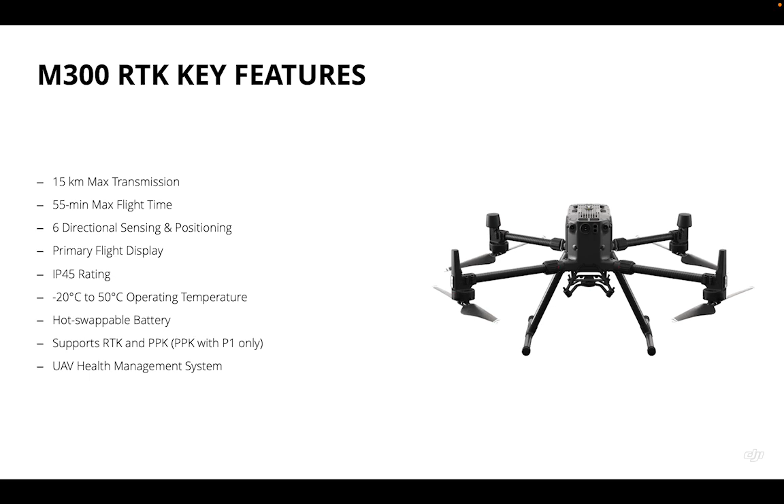It has hot-swappable batteries and supports both RTK and PPK. It also has a UAV health management system, which can track the status of the drone in real time. And equipped with the M300 RTK, we have our flagship payloads. For example, this is the DJI P1.

It's DJI's advanced higher-end photogrammetry payload, which has a 45 megapixel full-frame sensor, and is also equipped with a mechanical global shutter with shutter speed up to 1/2000, and a 3-axis stabilized gimbal, which can easily achieve smart oblique capture, meaning that while the drone is flying, the camera tilts to different angles to capture images, to save time and make it much smarter.

And for example, if we're talking about efficiency, we're able to easily achieve 3 square kilometers of area coverage in a single flight, at 3 centimeter level GSD. Compared with, for example, a Phantom 4 RTK, where per flight we're only able to achieve 1 square kilometer, this is at least 3 times faster than the smaller-size rotary drones.

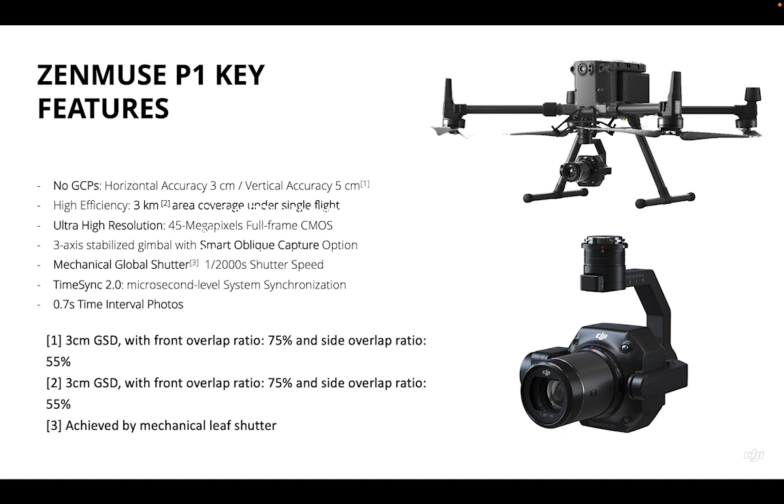For point cloud density, we're talking about 240,000 effective points per second, and it supports 3 returns. The maximum measurement range is 450 meters at 80% reflectivity. And the IP rating is IP54.

It also has a really unique feature called real-time point cloud live view, where customers can look at the screen and see real point cloud data on site, which can help them better understand the workflow and the job site. Again, it's an all-in-one solution, and once you collect the data, you can process it in DJI Terra.

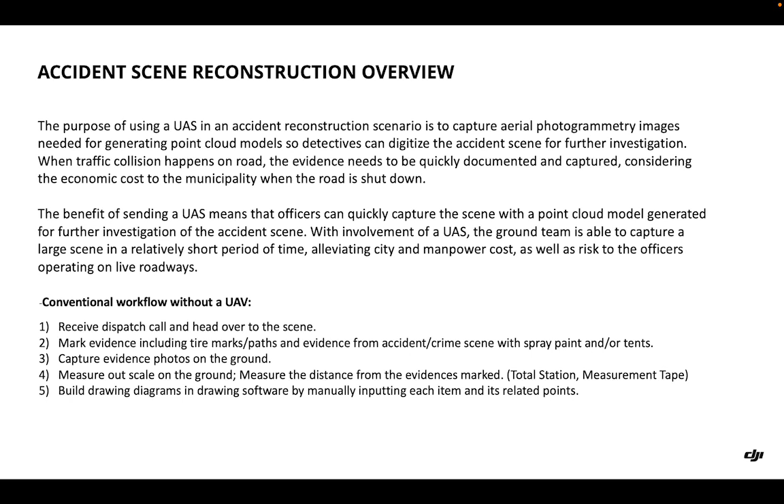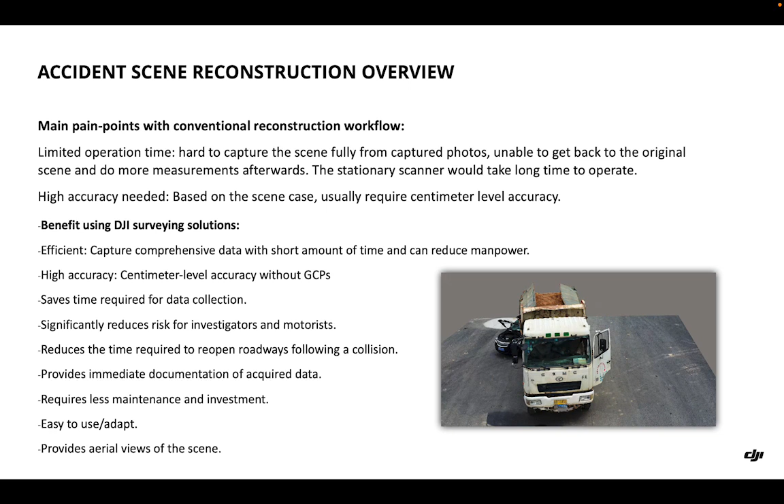So for example, this is one of the cases where data was captured by the Phantom 4 RTK, where 2 cars crashed into each other. We were able to deploy the drone quickly there and fly the area. We imported the data to DJI Terra to process it, and we were able to produce these high quality 3D models. We can see all the numbers, even plate numbers, and where the car got crashed, in a very high res way. So it's really powerful.

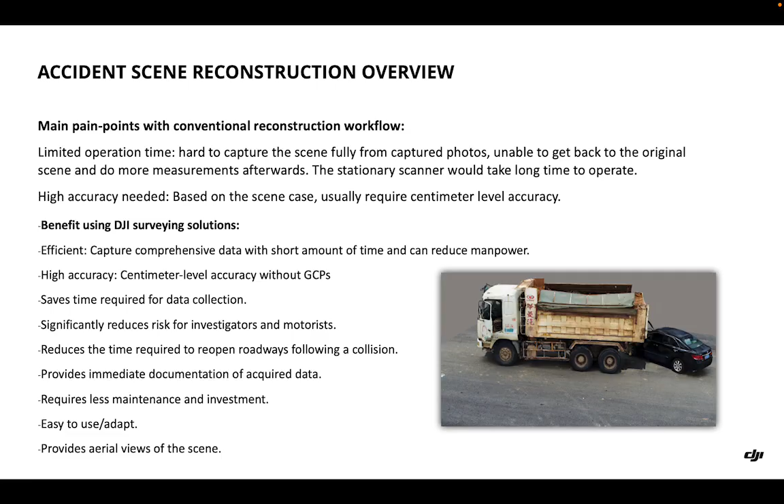And right now we have several different recommended solutions for different application needs. For example, car accident reconstruction: since this is not a really large area, and considering that police officers may want a smaller drone which is more portable and easy to carry, the Mavic 3 Enterprise plus DJI Terra could be one of the key solutions for this. Small enough, smart enough, quickly plan a mission, fly the area, and get data processed in DJI Terra, all in one.

But again, sometimes that accident may not necessarily be a car accident, but it could be a large scale disaster accident or whatever it is. If it covers large areas, and if we want to do not only mapping and modeling but also inspection works, the P1 has a high res camera on it and a much larger efficiency level. We are able to produce the drone footage in a large area and fly much longer. So this could be a solution as well.

For example, this is another solution from 2017, when a train crashed and went off the rails. We were able to deploy the drones there, quickly capture the data and process it all in one there, to help the officers decide how to do all the rescue jobs and also save the digitized data for later applications as well.

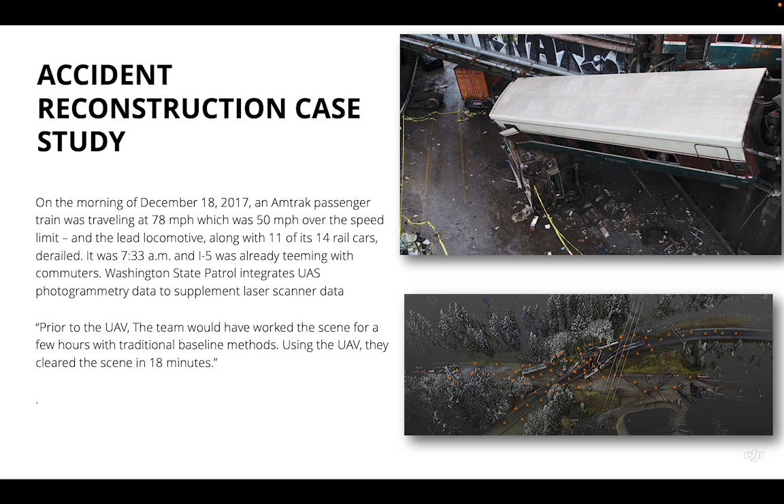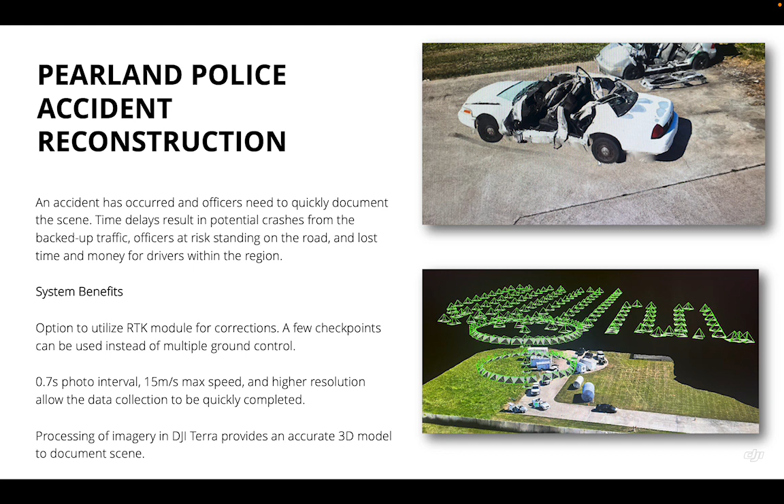This is another case from Pearland police. We flew the Mavic 2 Enterprise, and we captured data with different mission planning methods, like POIs and aerial 2D mapping missions, and with both we were able to quickly process and reconstruct the car accidents, save the digitized data for future applications, and help officers decide what's the next step.

So let's move to more high accuracy related geospatial solutions. And of course, one of the common applications could be cadastral survey solutions. When we're talking about cadastral survey solutions, the purpose of using a UAS during cadastral survey is to capture high resolution aerial photogrammetry images needed for generating an accurate surveying level map.

Sometimes cadastral survey could be really complicated. With the traditional method, the surveyor needs to bring their handheld RTK, walk around, and position and measure as many points as possible, which is really time consuming, and also some areas may not be easy to access. But those are not problems when using drones. We can quickly deploy the drones and fly the area to capture the landscape, all the buildings and roads, with all the pixel data. Then we can convert that pixel data to points to measure, digitize and vectorize the data, to produce what we need for cadastral surveying.

And of course, for cadastral survey, there are a few products that will be DJI recommended solutions. For large scale mapping, the M300 RTK plus P1 will be a recommended solution, because it can cover a large area, like I mentioned previously. If you want to know more detail about the DJI P1, we have another training deck. Please go to that training deck to understand more about how the P1 works, saves cost and brings efficiency up for all industry users.

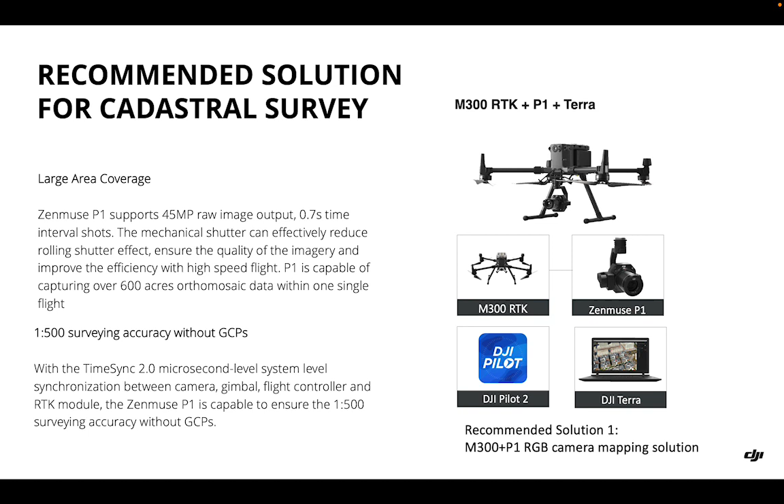And for a smaller area, for example if the total area is less than, let's say, 5 square kilometers, maybe the Mavic 3 Enterprise RTK could be a good solution, because it's portable enough, cheaper, same accuracy, smarter, all in one, and you can easily fly the area, capture the data, and then bring the data and process it in DJI Terra.

So this is one of the cases where we used the P1, from Datong city, China. We're talking about a 10 square kilometer area using the M300 plus the P1. The flight height is 240 meters. We were able to achieve 3 centimeter per pixel GSD. We flew 9 flights in one day and were able to capture 10 square kilometers of data. When we processed the data, roughly around 6,000 images, it only took about 9 hours in DJI Terra.

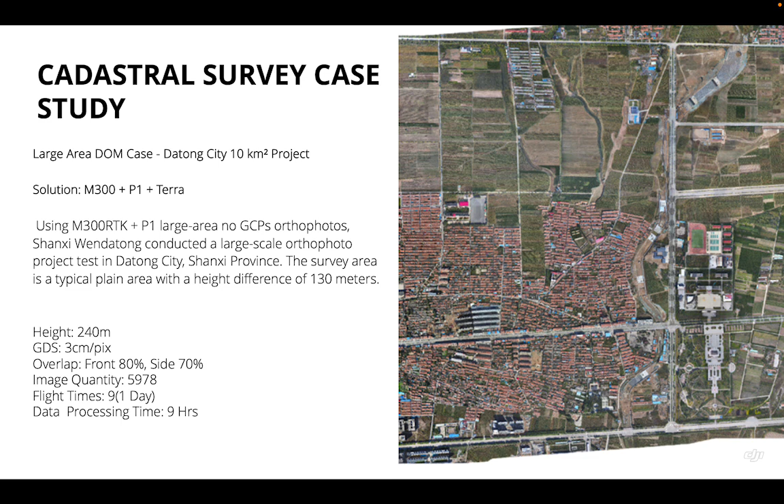And this is where we placed all the GCPs; you can see all the white dots are the GCPs that were evenly distributed. But we didn't use those GCPs to improve the accuracy; all the GCPs were applied as checkpoints so we could measure the RMSE accuracy for both horizontal and vertical, and we were able to achieve less than 4 centimeter accuracy for both horizontal and vertical.

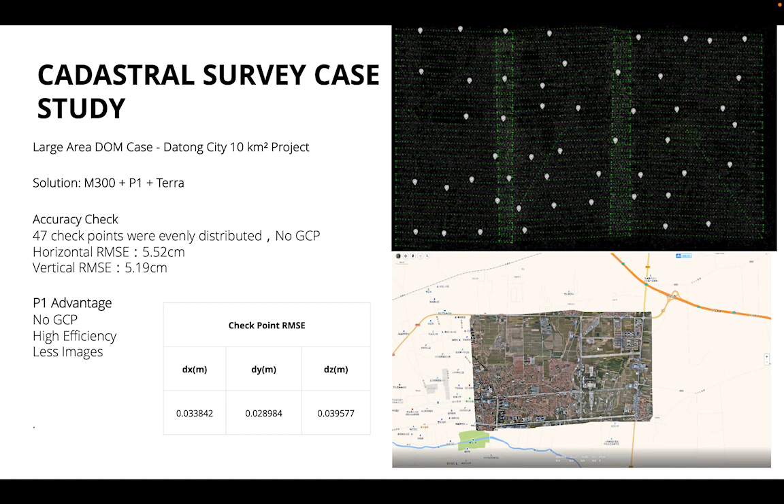And this is another case, again, one of the cases in China, in Anhui. The area is around 65 square kilometers, a 1 to 1,000 topographic project. We're using M300 plus P1 and DJI Terra. We flew the area at 260 meters and at 3.3 centimeter GSD. The area covered was 65 square kilometers in 3 days,

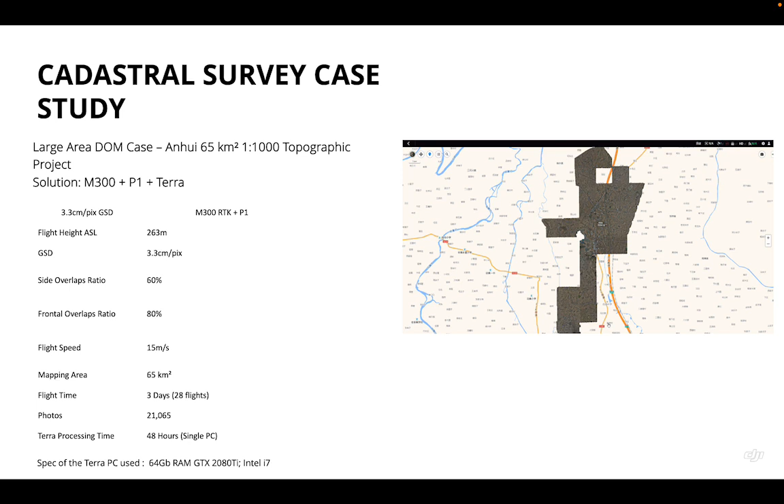28 flights, over 20,000 images, and it only took 48 hours for DJI Terra to process it. Single PC software and a single PC computer. The specs of the computer are 64 gigabytes of RAM, an RTX 2080 Ti and an Intel i7. This is what we are able to deliver for these cases.

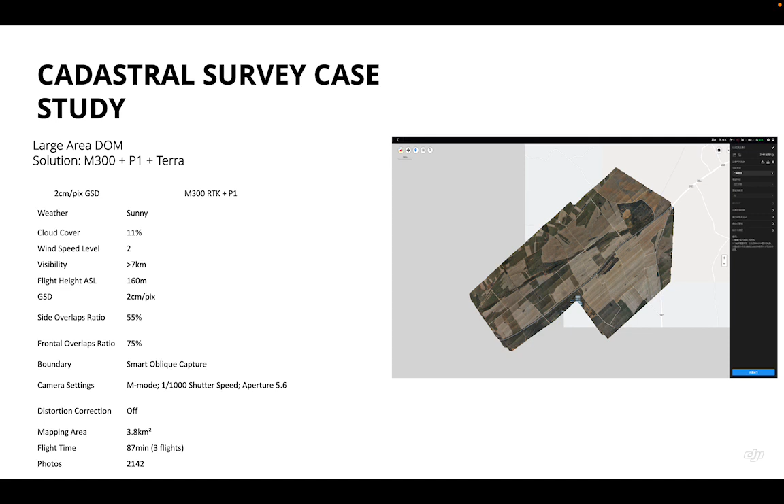Yeah, really incredible. And this is one of the smaller cases, where we're only talking about 3.8 square kilometers, and you can easily see that the flight time is really short, only 87 minutes, with over 2,000 images. Pretty much in a couple hours, you're able to deliver everything you need.

And this is one of the cases that we tested and applied using the Mavic 3 Enterprise plus DJI Terra. This is a relatively large area, and sometimes we may recommend customers use the P1. But this is still a great case where the customer used the Mavic 3 Enterprise to map over 15 square kilometers at least at 5 centimeter GSD.

One Mavic 3 Enterprise, 9 batteries, 150 meters altitude, and 4 centimeter GSD. In a single day, 15 flights, we were able to capture a data set like this, over 9,500 images within a day, and processed it.

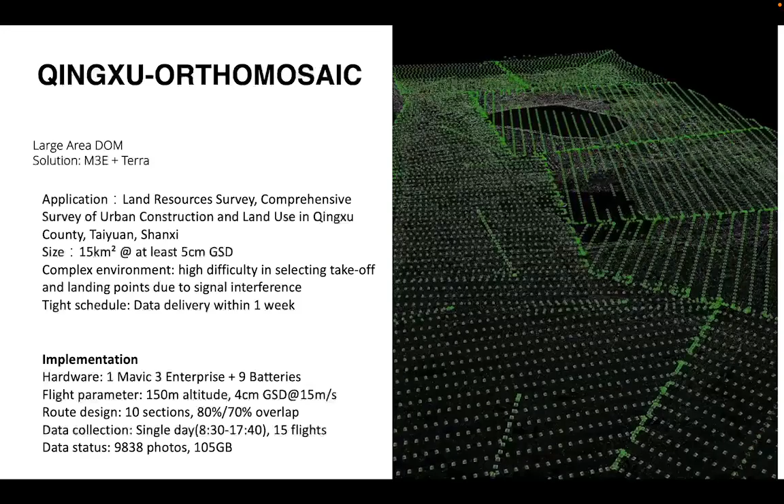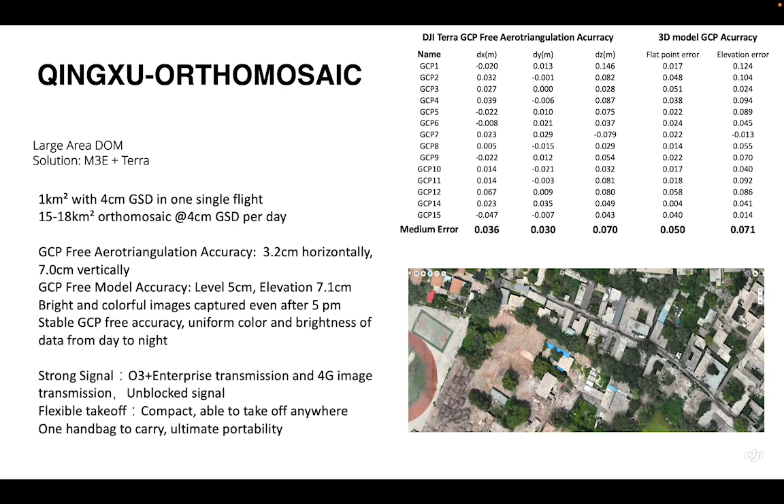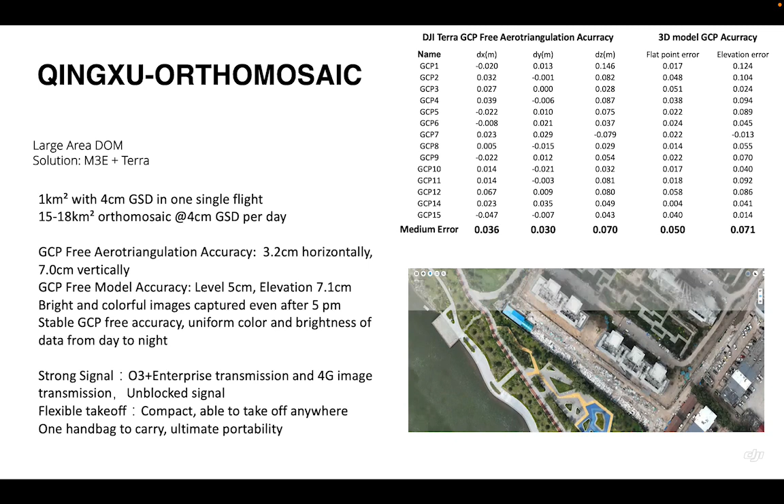And this is another case. Again we're using the Mavic 3 Enterprise. We were able to achieve this case within a day. You can see in the right corner the 2D map that we reconstructed using DJI Terra with data collected by the Mavic 3 Enterprise. The map quality and all the details are crystal clear, and the accuracy is pretty impressive.

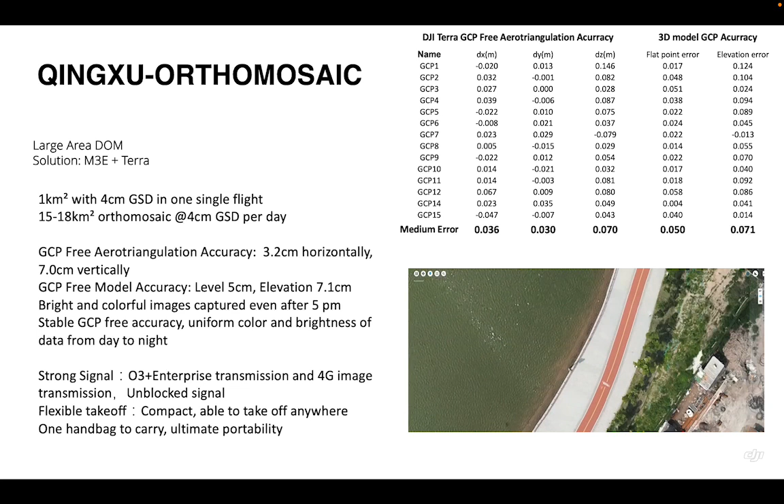So now we move to topographic survey solutions, which are sometimes not all about cadastral work; more cases are needed for landscape measurements and modeling. That's why we have solutions for this. One of the unique products we can use for topographic solutions is the LiDAR sensor, because of its ability to penetrate vegetation, right?

Sometimes when we're doing land surveys, we need to get the data of the ground and remove everything above it, like trees, buildings and towers. With the LiDAR sensor, because of the unique physical features of LiDAR, we're able to have different returns that easily help us differentiate the landscape and classify it into different classes.

So this is DJI's first all-in-one LiDAR solution, like I mentioned previously, which is equipped with a high-res, high quality geospatial camera, the same as the Phantom 4 RTK, plus the DJI LiDAR sensor and a high precision IMU system, in an all-in-one solution. And one of its key features is that it's really easy to use.

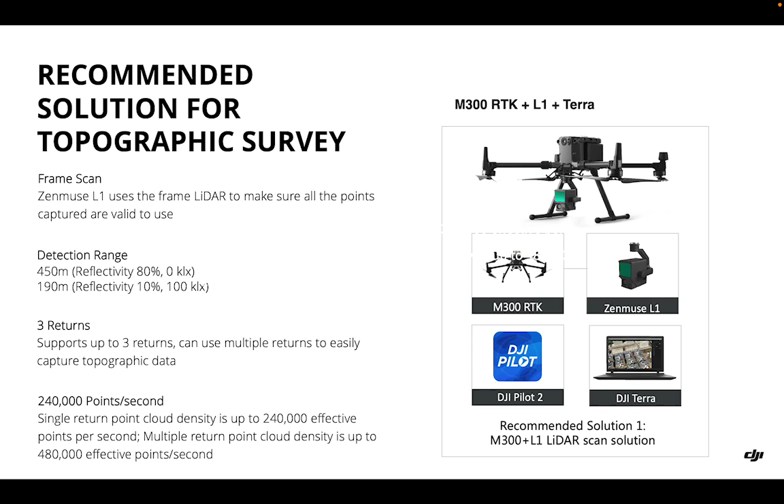With other LiDAR products, customers may need to do all the IMU calibrations manually by themselves, which really raises the level of skill needed to use the products the right way. But for the DJI L1, we build in all the calibrations automatically. Customers can fly the drones and do all IMU calibrations automatically. All the customers really need to think about is capturing the data and processing it. All the mission planning is built into DJI Pilot, which makes the solution much easier to use and operate.

And of course, the Mavic 3 Enterprise could be another solution as well. If we're talking about high accuracy and smaller job sites, the Mavic 3 Enterprise will be a turnkey solution for them.

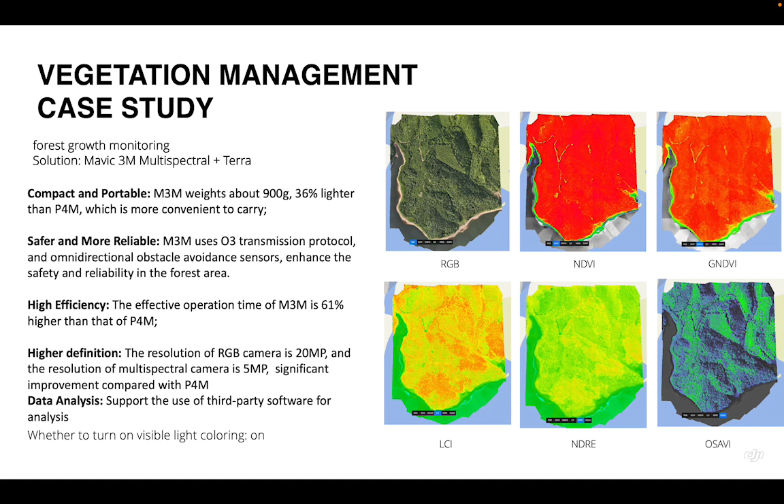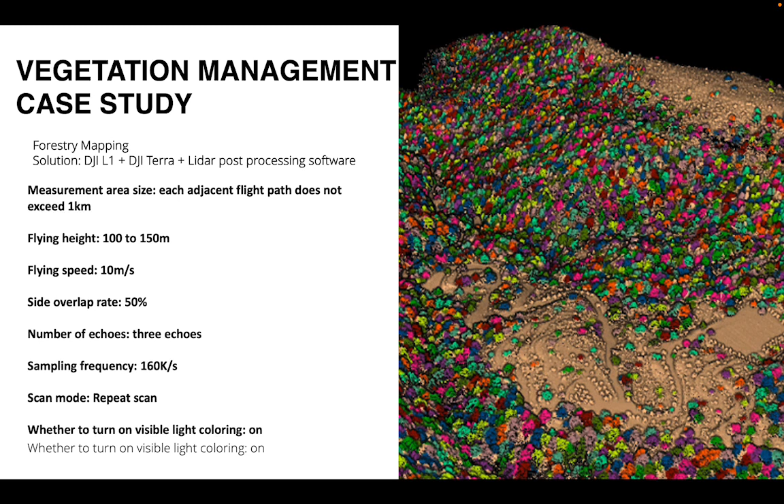And this is another type of application, like I mentioned, L1 for forestry management. For example, at this job site we flew from 100 to 150 meters, and we were able to capture and classify how many trees are in the forest. With that data, we can easily understand the tree stand count and apply it to further analysis, like biomass and other applications. And again, LiDAR, photogrammetry, and multispectral data can all be processed in DJI Terra, which makes DJI Terra even more powerful.

And let's move to a mining solutions overview. Mining sites and job sites are most of the time not really human friendly. All the dust and elevation changes are really risky to human life. But we still need to do all the surveying and mapping jobs to understand the cut and fill, where we need to move the dirt, and to do mining job site management as well. That's why drones can be a great tool to replace a lot of field work.

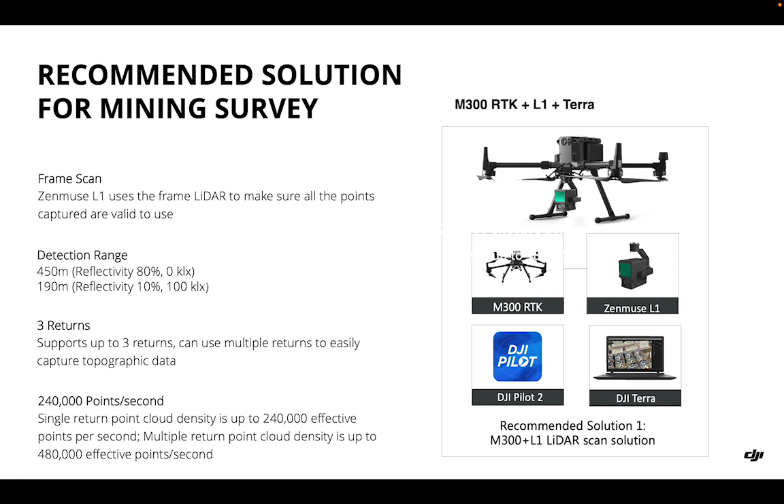Again, the L1 could be one of the tools, because LiDAR physically captures all the points, which makes it much more efficient. Once you collect all the points, you can directly measure the volumetric changes of all the piles. And sometimes mining sites are open areas with vegetation coverage, which can easily be classified into different categories to understand the landscape.

Also on the mining side, with barren ground in large areas, P1 could be one of the tools to better understand the area and collect data, and also to produce all the points, using photogrammetry algorithms to understand the areas.

Again, customers will need smaller drones for portable applications, like drive-around applications for smaller job sites, to better understand the area and have a quicker walk around.

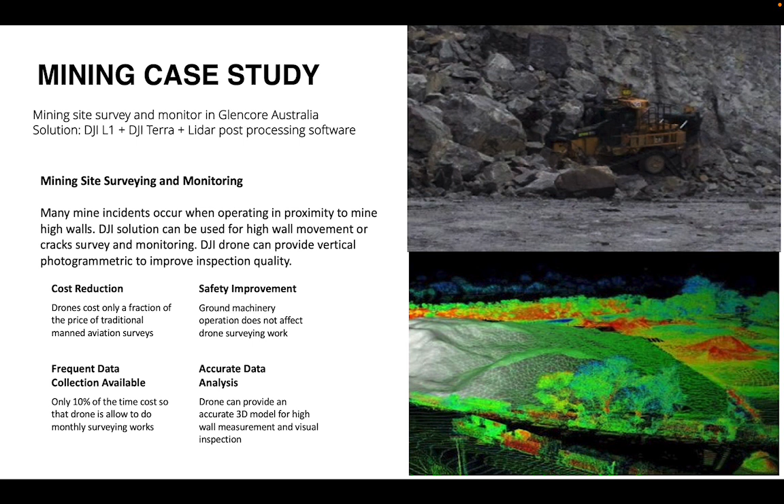This saves time to process the data and deliver it as a one-person solution. So this is one of the cases for mining applications. This is DJI L1 plus DJI Terra, because the area was covered by piles, trucks, and trees. We're able to use DJI L1 LiDAR to differentiate different classes and produce the ground information, which saves cost and brings highly accurate data. Again, safety is always key for these types of applications.

Lastly, I want to talk about construction applications using DJI Geospatial Solutions. The architecture, engineering, construction vertical focuses on the construction process from dirt work through building and into facility management and maintenance. Drones provide valuable data from the pursuit stage to planning, build, construction, permits, and inspections. From our observations, drones are already heavily applied in construction industries, especially for cut/fill fields and dirt movements.

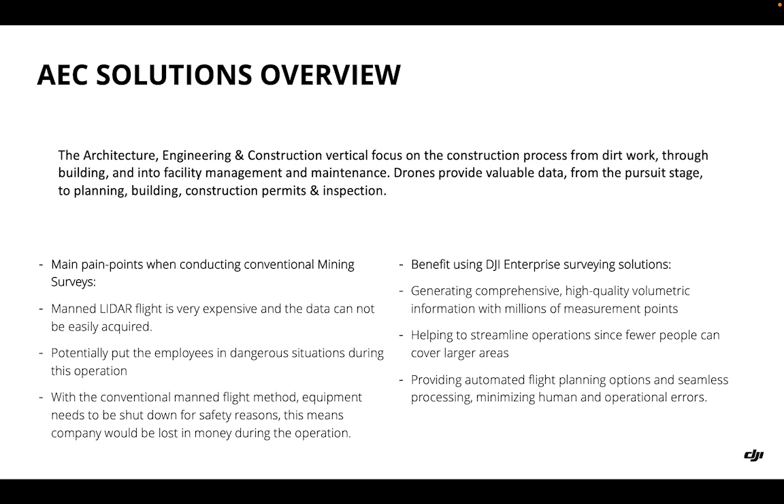Again, it's the same case as the mining side. If the area is sometimes covered by vegetation, you may need LiDAR solutions for it. And also if the construction job site is really large, P1 is always going to be an option.

But most commonly customers were using Mavic 3 Enterprise because every single construction job site is relatively middle-sized, and customers need to drive around to different job sites. Mavic 3 Enterprise is great because it can be easily carried with them to go from position A to B to C. And because of its high accuracy, ease of use, and smart features like terrain follow and real-time capabilities, it makes it a really powerful solution for capturing the landscape and data in a more accurate way.

Then you can import that data into third-party software solutions, for example DroneDeploy or Propeller, which based on their design file can easily understand all the cut/fill fields and provide data insights to decision makers to manage all the ground machines doing the cut/fill and digging work.

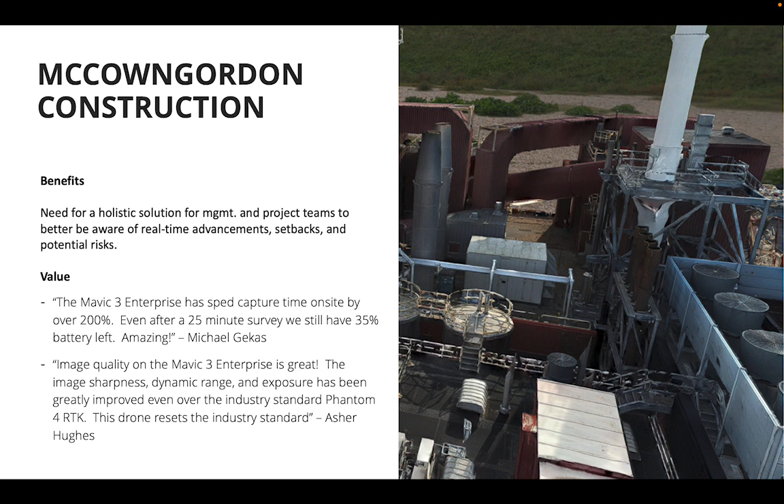So this is one case from McCownGordon Construction, where Mavic 3 Enterprise captured data very quickly, and because of the image quality, we were able to get this data set at really high resolution, in both 2D map and 3D model forms.

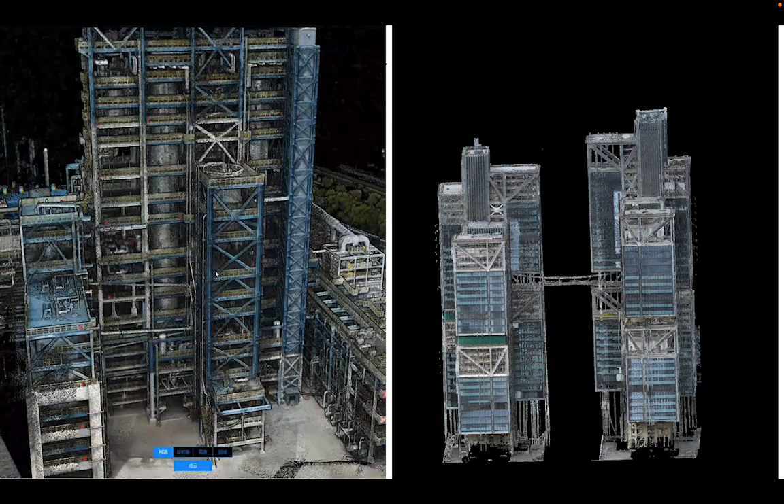On the left side is a refinery construction area captured using LiDAR, because sometimes photogrammetry struggles to reconstruct complicated pipes, but that's not the case for LiDAR since it's a direct measurement. When we fly the area, we're able to easily understand all the positioning information, buildings, and other structures.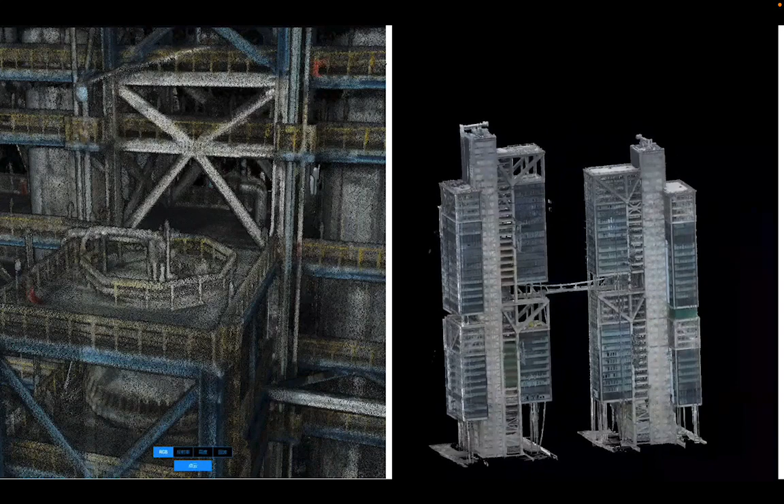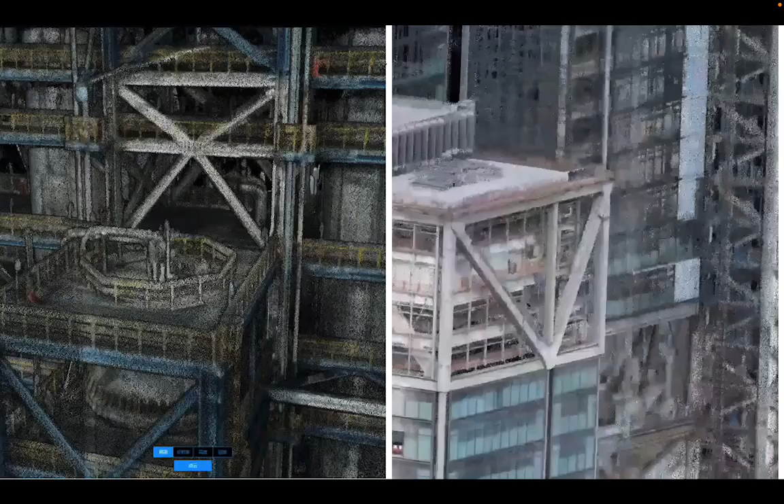And the right side is actually DJI's new headquarters, Sky City. Right now we have already moved into our new Sky City headquarters, but during the reconstruction we can see how we used our drones to help and apply to our construction progress, to better understand the progress and status, and to help build this building.

So this covers all the DJI enterprise solutions for geospatial industries and applications.